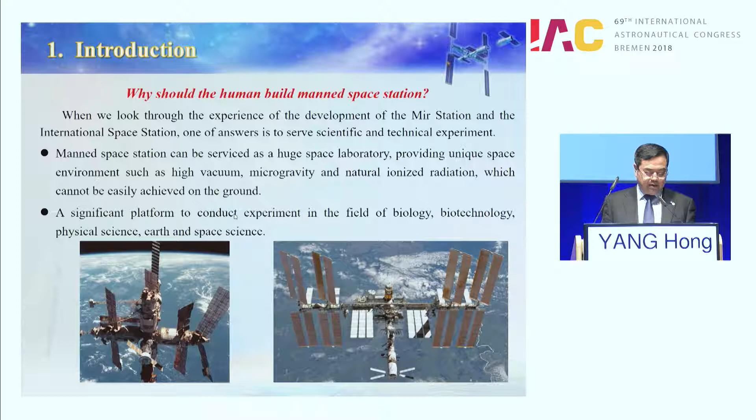The manned space station can be used as a huge space laboratory, providing a unique space environment, such as high vacuum, microgravity, and natural ionizing radiation, which cannot be easily achieved on the ground. It can support the platform to conduct experiments in the fields of biology, biotechnology, physical science, earth and space science. Now, next, this is the China Space Station.

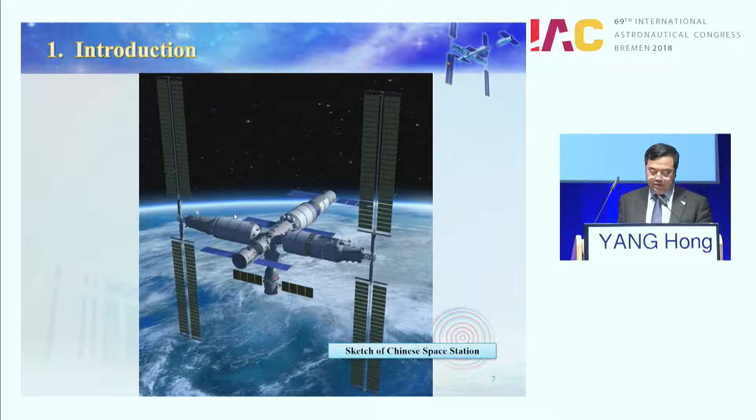China Space Station. China Space Station is CSS, named Tiangong. The name Tiangong comes from the story of Chinese mythology. The story happens in a beautiful palace in space, so-called Tiangong. It means the palace in space. I like this name.

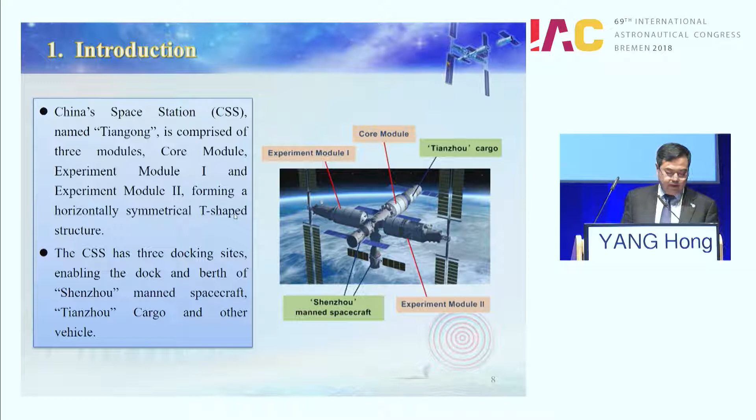The CSS is composed of three modules. Core module, this is the core module. Experiment module 1, experiment module 2, forming the horizontally symmetrical T-shaped structure. The CSS has three docking sites, enabling docking and berthing of the Shenzhou manned spacecraft, the Tianzhou cargo vehicle and other vehicles.

This is EM1 and EM2. EM1 has an airlock module for EVA. A special robotic arm, the small robotic arm, supports the experiments. Small-scale adapters for exposed payloads of scientific application and experiment. The EM2 has an automatic scientific airlock for equipment, only for equipment. Large-scale adapters for exposed payload.

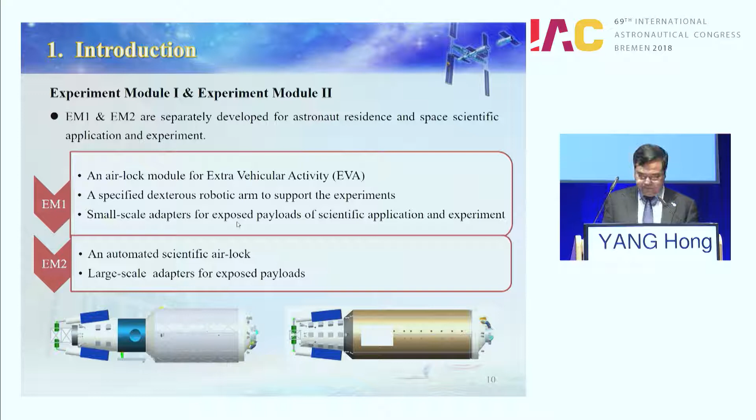This is the system architecture. Orbital inclination from 42 to 43 degrees. Orbital altitude from 340 to 450 kilometers. Lifetime, about 10 years. Crew members, 3, and 6 for short term. And weight is about 70 tons, the basic shape. If you add 2 Shenzhou spaceships and the Tianzhou cargo spacecraft, the total weight will reach nearly 100 tons. It will be expanded to 180 tons in the future.

Okay. It can support various scientific experiment equipment in and out of the cabin. The total power generation capacity is 27 kilowatts. The biggest feature of the Chinese space station is that it provides maximum support for space science experiments under the constraints of limited weight and scale. During in-orbit operation, the operating cost is also effectively reduced. That is to say, CSS doesn't aim for total scale, but focuses on low cost and high efficiency. I think this is very important for the long-term operation of the space station.

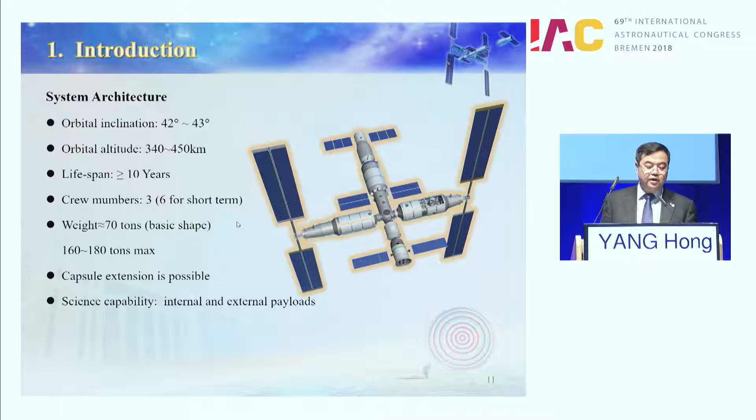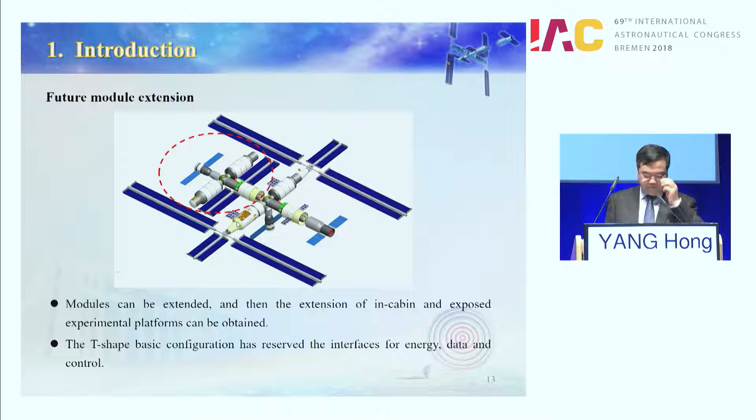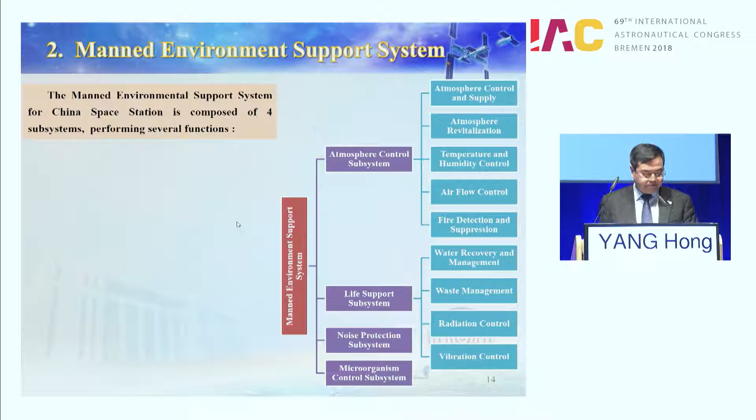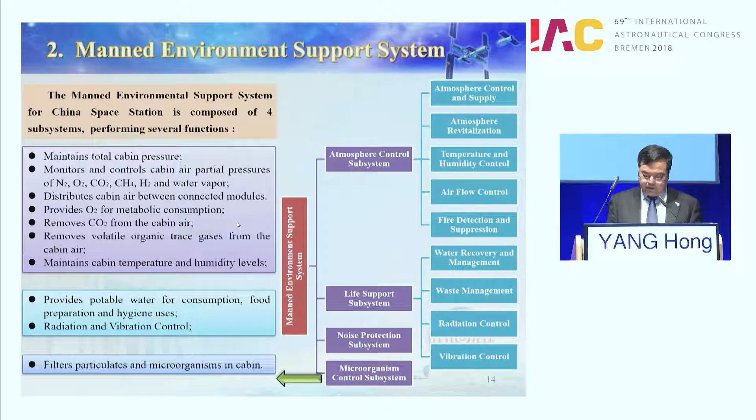So, the manned environment support for CSS is composed of 4 subsystems: the atmosphere control subsystem, the life support subsystem, the noise protection subsystem, and the microorganism control subsystem. This is the atmosphere control subsystem. Its task: maintain the total cabin pressure, monitor and control cabin air partial pressure, distribute cabin air between the connected modules. The life support system provides potable water for consumption, food preparation, and hygiene use, radiation and vibration control. And the microorganism control subsystem's task is to filter particulates and microorganisms in the cabin.

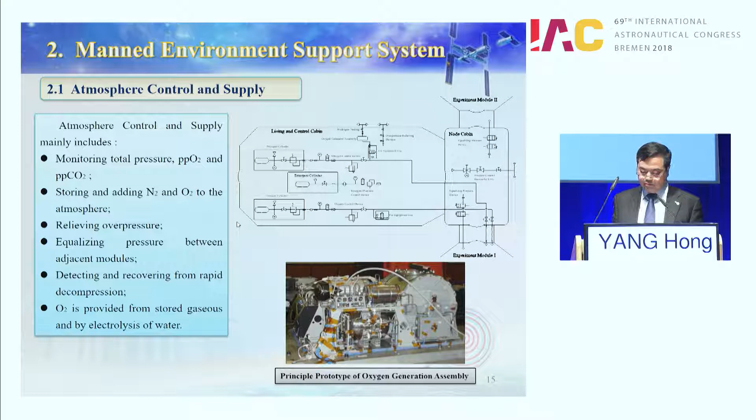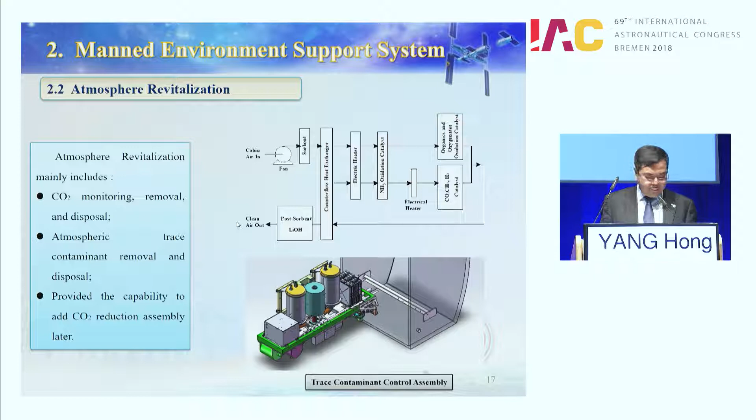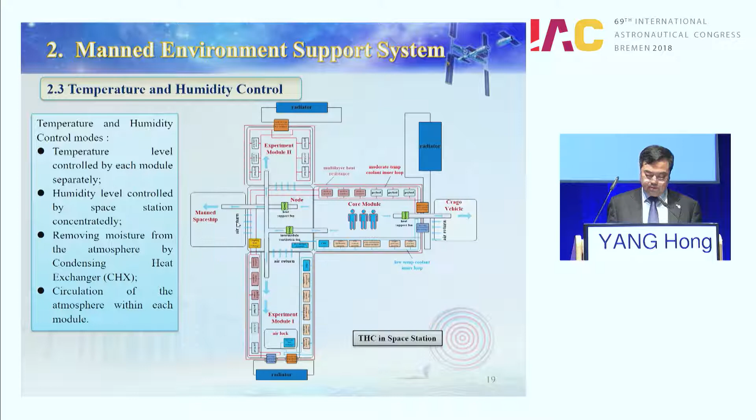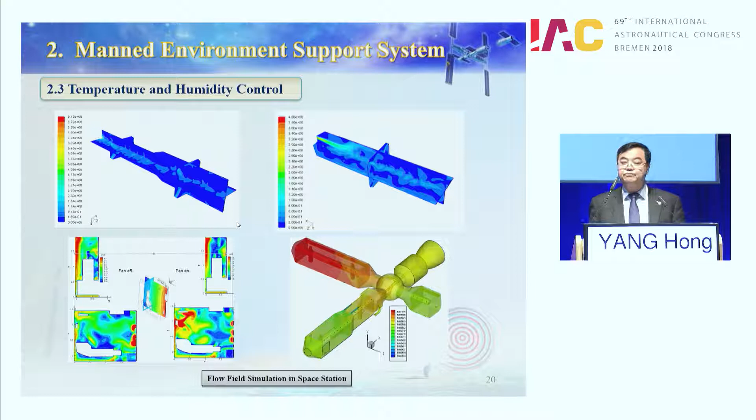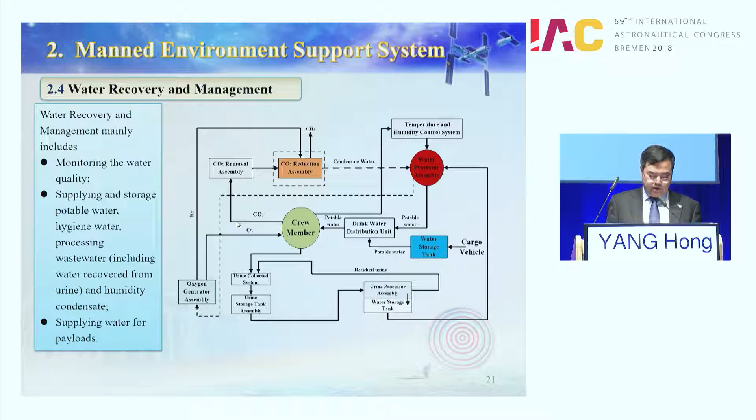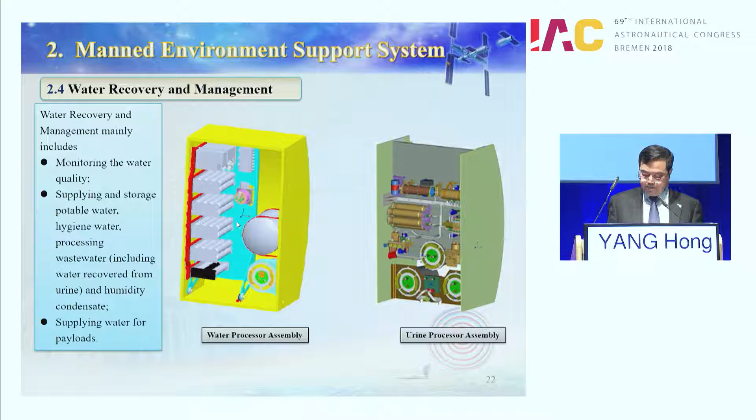This is the water recovery and management. It includes monitoring the water quality, supplying and storing potable water, and processing wastewater recovered from the urine and the humidity condensate, and supplying water for payloads. This is a water processor assembly. This is a urine processor assembly.

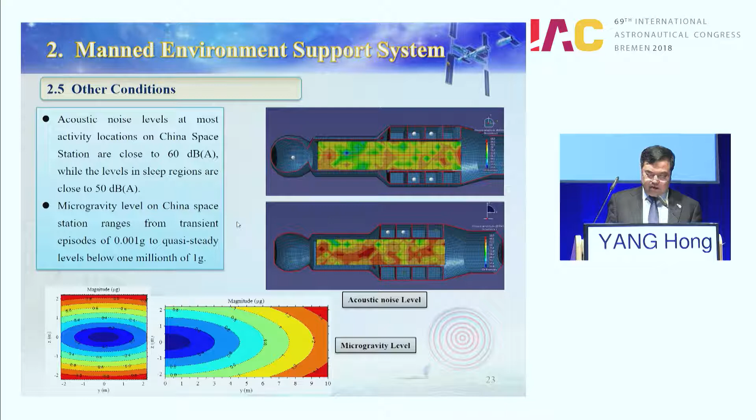The other conditions: acoustic noise levels at most activity locations on CSS are close to 60 dBA, while the levels in sleeping regions are close to 50 dBA. Microgravity. The microgravity level on CSS ranges from transient episodes of 0.001 G to a quasi-steady level below one millionth of 1 G.

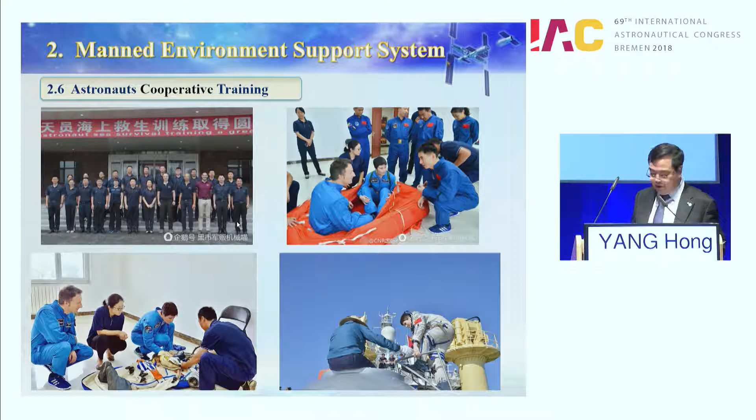This is astronaut cooperation training. Two things are mentioned in particular. This is astronaut survival training, and the joint training of the Chinese astronauts and European astronauts in China. The European astronauts are Samantha Cristoforetti and Matthias Maurer. This is the training in China. This is training on the sea.

Another thing, the Chinese astronaut training underwater. Chinese astronauts have been training for EVA for the CSS mission. This picture is the scene of underwater EVA experiments. In the upper left corner is the core module of the CSS, and on the right is the astronaut. And the following two pictures show the training of Chinese astronauts in EVA activity with the help of divers.

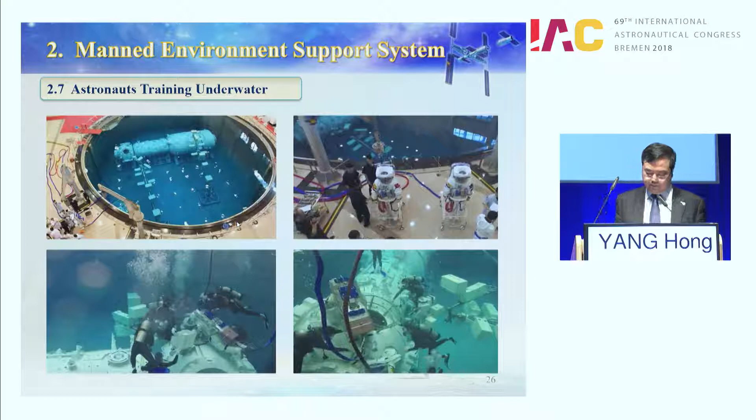Next, I will introduce the scheme of the experiment support system.

The experiment support system serves payload with both standard and special interfaces. Standard interfaces are the majority, providing the payload with uniform interfaces for mechanism, electrical power, communication, data handling, and thermal control. Special interfaces are the minority, providing the payload with unique interfaces, designed according to the demand of the payload.

The payload on board CSS can be classified into three categories. The pressurized payload is accommodated by payload rack. Standard exposed payload is accommodated by payload adapter. The third, special exposed payload, is accommodated by custom-made or extended interface.

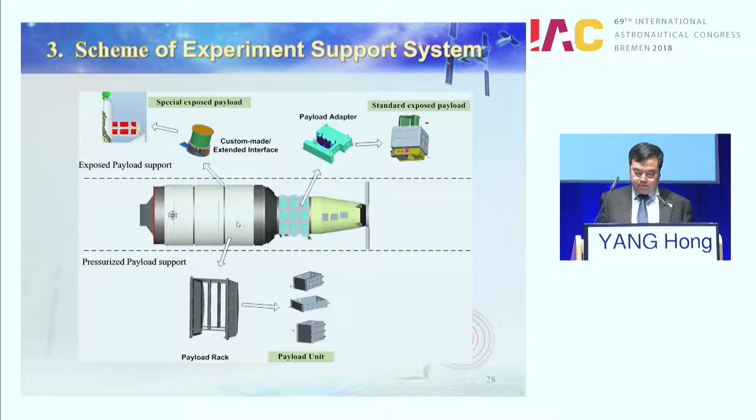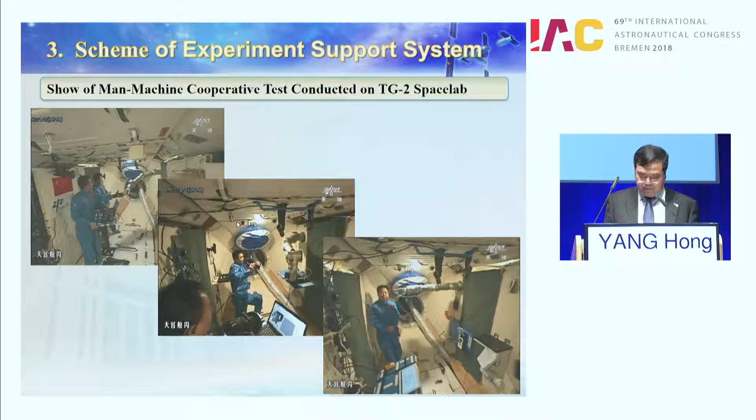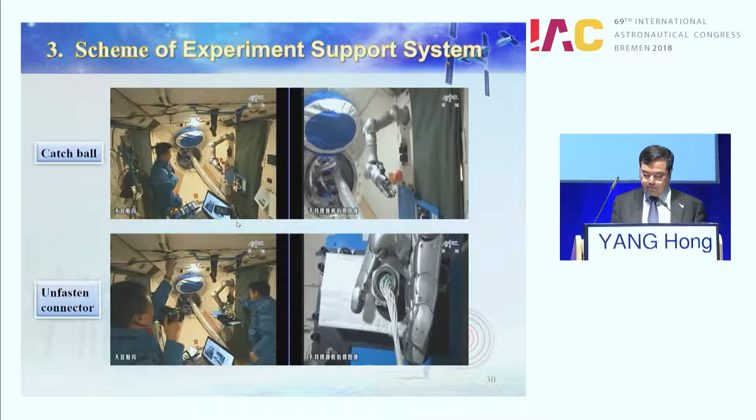The robotic arm, as shown in the picture, catches the ball and unfastens the connector, gripping and screwing the bolt.

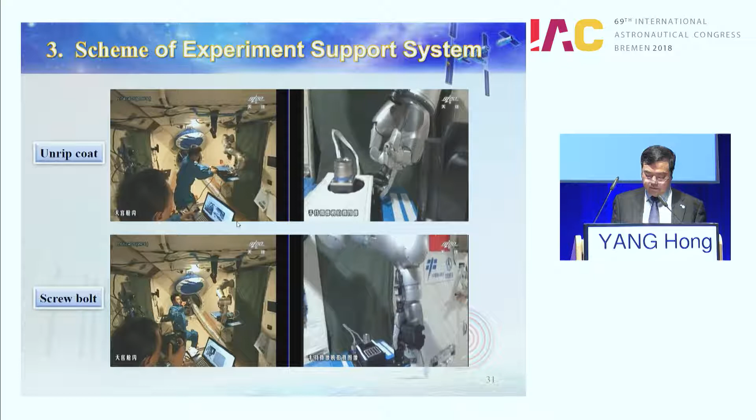Now, for the pressurized payload, the payload is packed into a unified model named the payload unit, with different types. Resources can be obtained by the payload unit from the payload rack.

The payload rack includes mechanical space for installation, electric power of DC 100V or DC 28V, communications via serial bus, data handling of about 100 Mbps, and thermal control using ventilation and cold plate.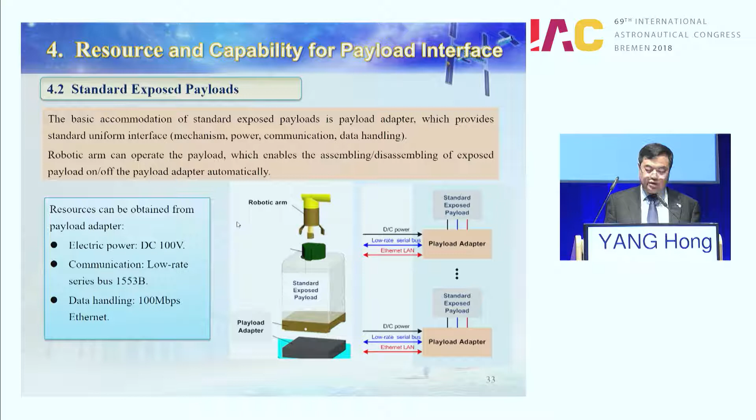For special exposed payload, the accommodation is a custom-made or extended interface. One type is the special exposed payload fixed on a custom-made interface, launched with the vehicle. The extended interface reserved on the vehicle can support special exposed payload assembly in orbit.

The interfaces available for special payload include mechanical, fixed on the vehicle or assembled in orbit, as well as power, communication, and data handling.

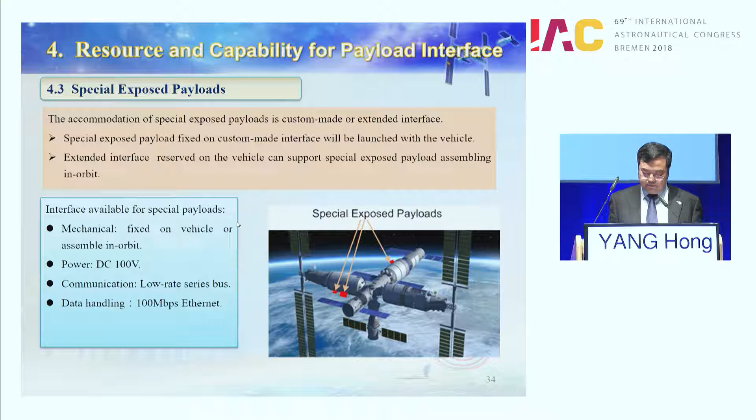Now for the summary. The main features of the life and experiment support on CSS are concluded as follows. One, the manned environment is comfortable and suitable for long-term visits of crew members.

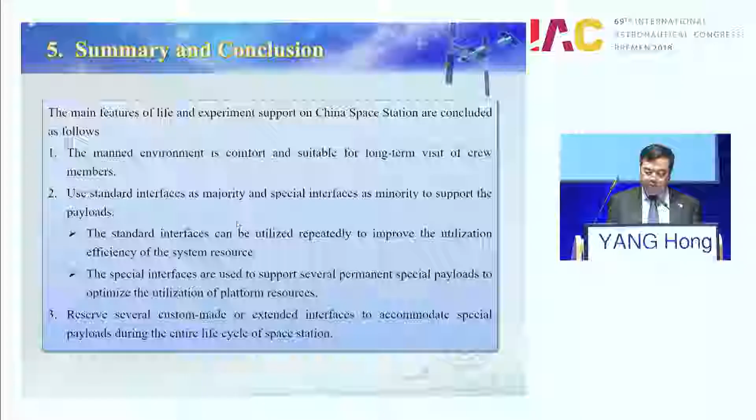Two, the system uses standard interface as the majority and special interface as the minority to support the payloads. The standard interface can be utilized repeatedly to improve the utilization efficiency of system resources. The special interface is used to support several permanent special payloads to optimize the utilization of platform resources.

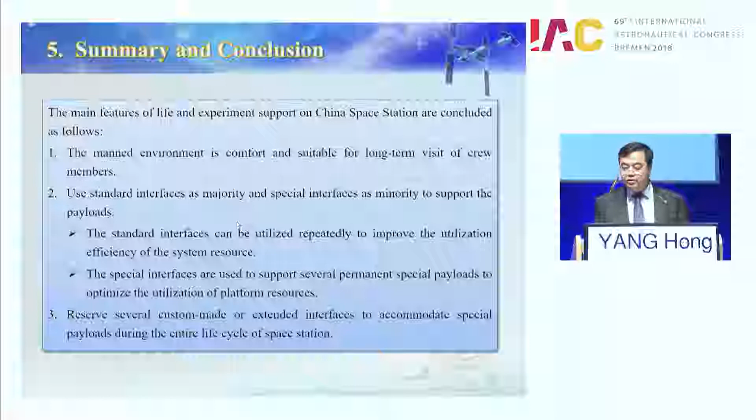Three, reserve several custom-made or extended interfaces to accommodate special payload during the entire life cycle of the space station.

Four, the experiment resources on CSS can be shared through international cooperation. Five, the possible technical approach for developing international cooperation.

Releasing the international standard on the pressurized payload interface requirement, overseas payload could be accepted in the form of payload units, conducting experiments inside the payload rack.

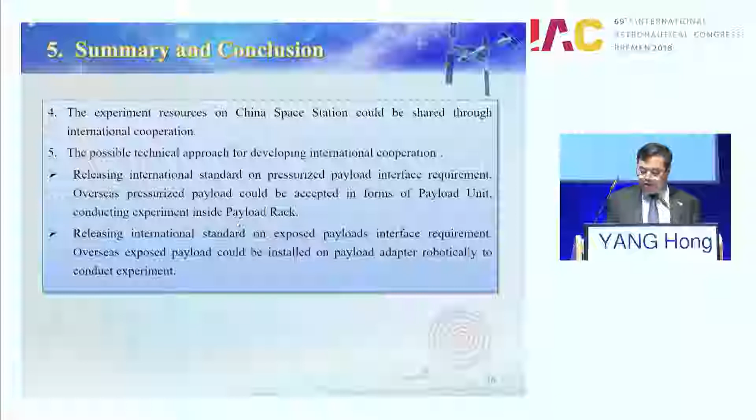Releasing the international standard on exposed payload interface requirement, overseas exposed payload could be installed on the payload adapter robotically to conduct experiments.

Hello, thank you for your very interesting presentation about this fantastic endeavor. Could you tell us when the station will be completed in the shape, in the format you just indicated?

Sorry, could you repeat your second question? When will the CSS be deployed in space in the format you just indicated?